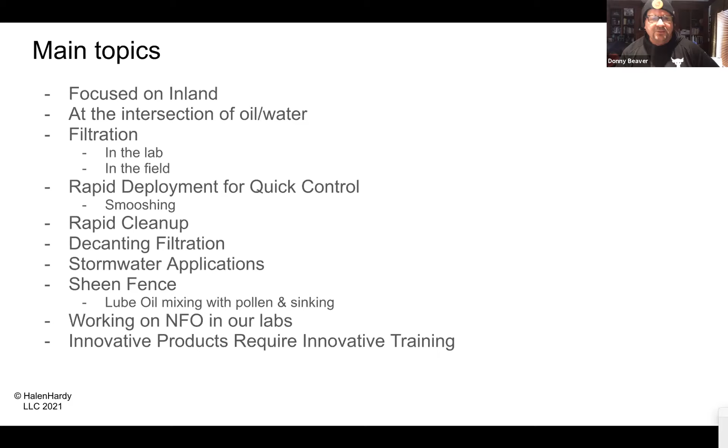So basically, I'm at the intersection of inland, where water meets oil, and a lot of times it's where stormwater meets oil before it gets to an inland body of water. To Vince's point earlier, it's better to head it off at the pass if we possibly can. So a lot of our efforts are focused on preventing it from getting into waterways, and then helping once it does.

The first video is talking about this intersection, and I just about flunked out of high school physics. Really didn't see any use for it until I got into the world of cleaning stuff up. And so we decided when we started HalenHardy to create our own little torture trough as a way to test the popular spill control materials that are used on land or inland.

Clay is first. Our torture trough is 16 inches wide. It's about a gallon of water a minute at a 5-degree slope. And you can see the stuff fails right away. It's no surprise. What was a surprise to me is that over 70% of all spills seem to happen in wet weather on the inland side of things.

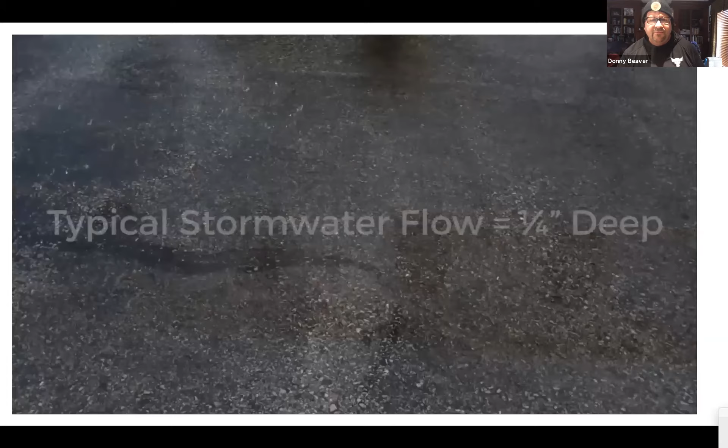And the same thing is true with white spill materials. They hate water, so the oil floats up and over or around or moves the product out of the way. So we decided to go back to the drawing board, and instead of trying to fight Mother Nature, we'd work with her. And we noticed that sheet flow is normally about 1/4 inch deep in an average Pennsylvania rain event.

And so when we started to do the physics of why this stuff is not working, we realized pretty quickly that a 3-inch sock only has a 1-inch bottom that's in contact with the surface area of where the spill is happening on land. Now in the water, it would be the facing side of it. But because most of these materials are made to float, which is really good if you're in a body of water, on land it's not good. No matter how you try to position it, they just want to float out of the way.

And even once positioned, there's always nooks and crannies where the oil can sneak around, since the oil floats on the water, and it just finds the path of least resistance and down the drain. And so we came up with the term flat's where it's at. We needed more surface area. We needed a material that would allow water to filter through.

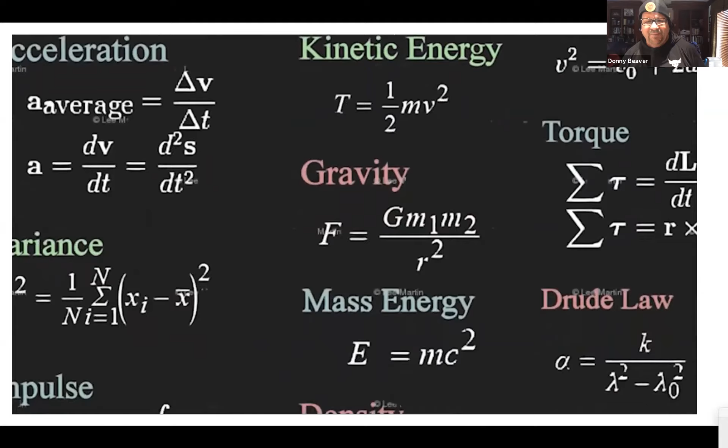And so we found some fibers. Actually, we found recycled 100% post-consumer waste that would hold back the oil, keep the oil on the upstream side, and let the clean water filter through. And so my friend Albert Einstein comes into the equation again, and we said, all right, just how thick should it be? And we came up with 1/2 inch, sort of arbitrarily at first, because if you notice, the line there represents 1/4 inch of rainfall.

And so we thought if we doubled that, that might be a good place to start. And as it turns out, we sort of lucked out after 3,000 or 4,000 hours of coming up with an 8-inch wide, 1/2 inch thick strip that would handle most normal rain events for an inland oil spill.

And as we were talking, the more surface area you have, so these particular strips were designed to be 8 inches wide versus the 1 inch surface area of a sock. So you have 800% more surface area, plus our stuff doesn't float, which runs sort of counterintuitive to what most people think about oil spill products, but on land, it's real helpful. And there's an overhead shot of how it works.

So I went to work where a lot of our other products were cooked, in my garage at home. That storm drain goes into the municipal stormwater system, so I have to be a little careful because everybody knows what I do.

So then we started to ask the question, what happens if you have more than 1/4 inch of water? And we realized that we could stack our strips on top of one another and then create what we call a filter ramp or the shingling effect on the upstream side. And so you can see the dry part, the water isn't breaching the dry part, and the oil is held back and the clean water filters out the other side.

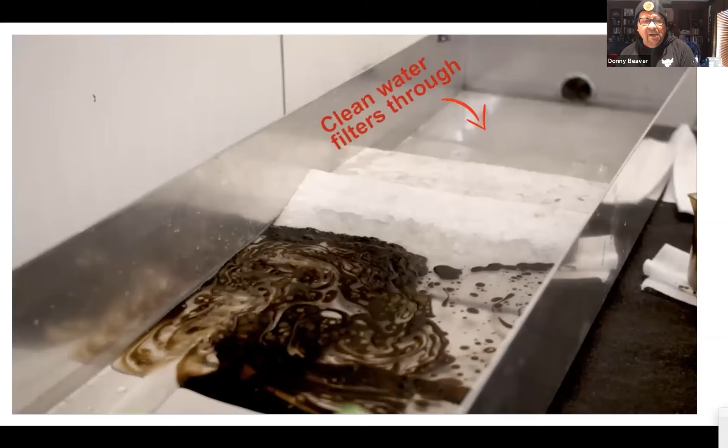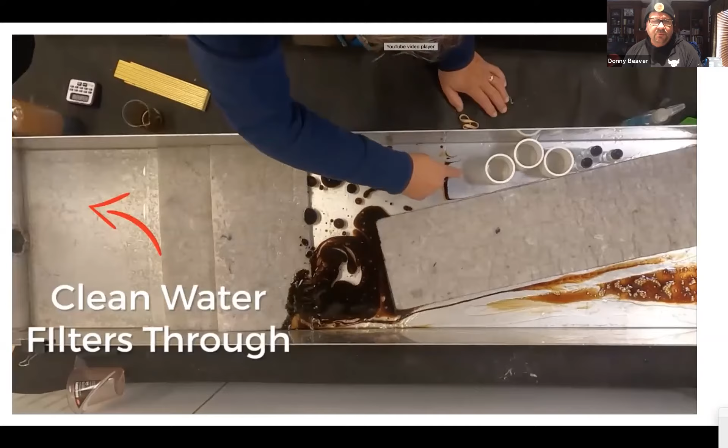And so with that in mind, we started to say, what else can we do with this, or what ways can we utilize this? I dare not call it a technology because compared to everybody else's, it's pretty simple stuff. But we thought, well, could we steer a spill with this? And we found out, yes, indeed, we could steer a spill underneath my elbow or the assets that we were trying to protect. And we steer the spill to the ramp where we want to stop it, and we prevent it from going toward the assets. So it's real helpful to keep the oil from going where you don't want it.

So we sort of had what we call the trifecta: steering, stacking, and shingling, so that we can shield the drain downstream there from the oil getting to the drain.

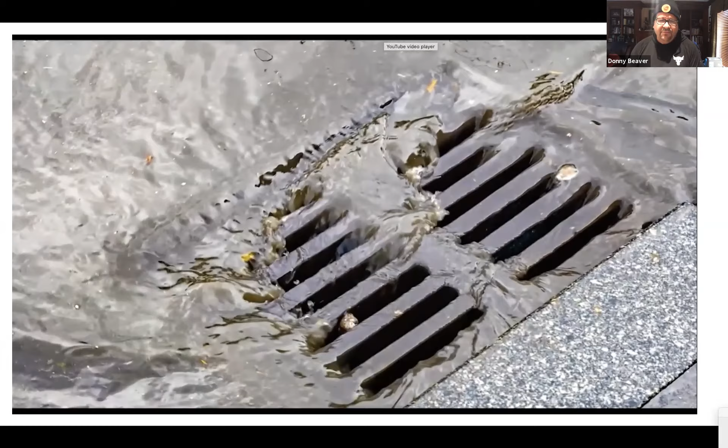And then, of course, form follows function. And so we said, what would be the best form to start with? And so we started with a trout stream. I've been protecting trout streams for 40 years. And we said, let's work backwards from the trout stream. Let's go up the ditches and the gullies and through the wetlands. And where does this stuff come from? And most of us know it comes not necessarily from a cul-de-sac, but from a storm drain. And we said, well, let's make our stuff the right size to cover a storm drain so that we could shield it and act as that first line of defense so it doesn't get into waterways.

So this is a standard size 32 by 48 inch. We call the material Husky. This is a live in the field situation where you can see the outline of the storm drain is sort of lighter colored and the oil is collecting on the edges. And it's usually 45 minutes to an hour till a spill response team shows up, but the frontline worker can put this down and sort of at least have his first line of defense in place while he's waiting.

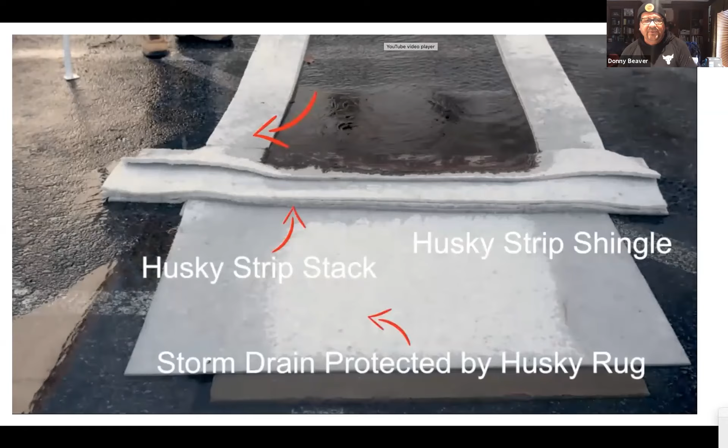And then we took this steer, stack, and shingle idea, and this is a controlled spill, but we have about 5 gallons a minute of water coming down. We put the strips on either side to act as a steering device. We stacked and shingled at the bottom part, and the oil never breaches. And below it, you can see the outline of the storm drain. So we borrowed Ron Popeil's pocket fisherman, or no, I guess it was the toaster oven or whatever, set it and forget it.

Then we discovered something else. Our materials were highly compressible. And so we thought for frontline workers, it would be pretty cool if we, we call it smooshing, smoosh them down. So these are 5-gallon spill kits, side by side, typical bucket, typical spill duffel, and then our filtration materials.

And we just give you a little unzip tool. That 32 by 48 inch pack is inside. And essentially, it helps frontline workers: seat pockets, underneath the seat, in a toolbox, any little nook and cranny you have on your vehicle, behind the seat of a backhoe, are all good opportunities. And so that was our first line of discovery that we did as we were starting HalenHardy.

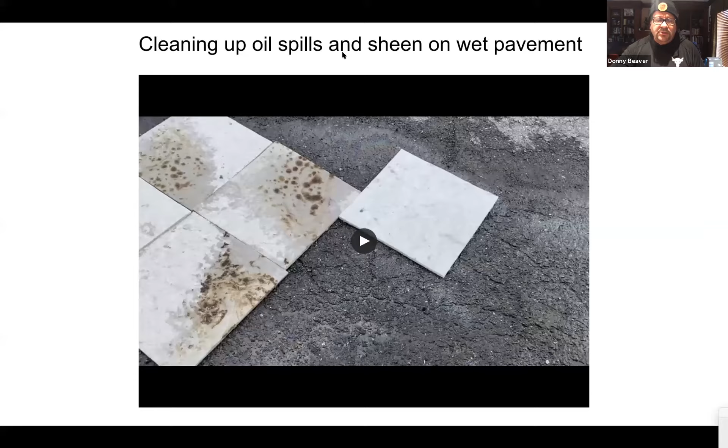And then the next was, okay, that's doing a good job of steering it and preventing it, but what about cleaning up? And here is a little pothole in our parking lot. We created a sheen at first. This is used motor oil. We like to use that just to be visual. And then we created also that extra little plops on top.

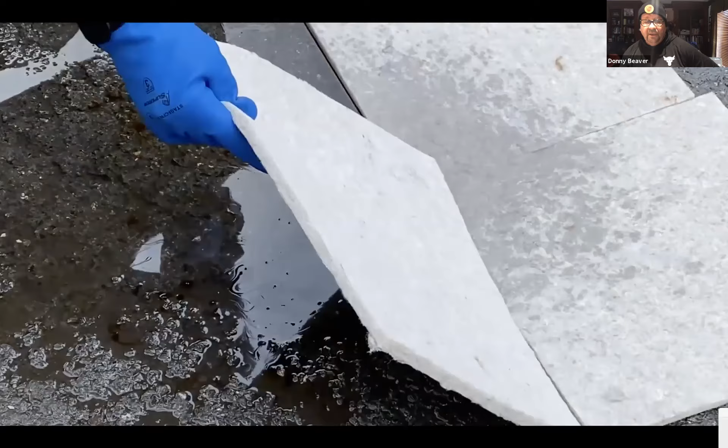And we take the same material, and because it doesn't float, you don't want to throw this out on a body of water, but on land you can lay it down. And essentially what it's doing is it's allowing the oily water to filter up into the fibers, and the oil is sticking to the fibers while the water wicks through. So you'll be able to see as we flip it over here in a second that even the fine swirly oil as well as the blobby stuff is showing up nicely.

And you can see behind when we lift them up, there's no real visible sheen underneath to speak of. And this is a very small spill. Obviously, all these things have their own capacity. Each one of these, it's about a half gallon. But there was a sheen remaining around the pothole after we got rid of all the water. So this is just demonstrating how the same materials can be used.

They're thick and spongy. And so you can basically, without a lot of labor, we call it a few love taps here, just pluck the sheen off the ground down into the nooks and crannies of the pretty badly cracked blacktop.

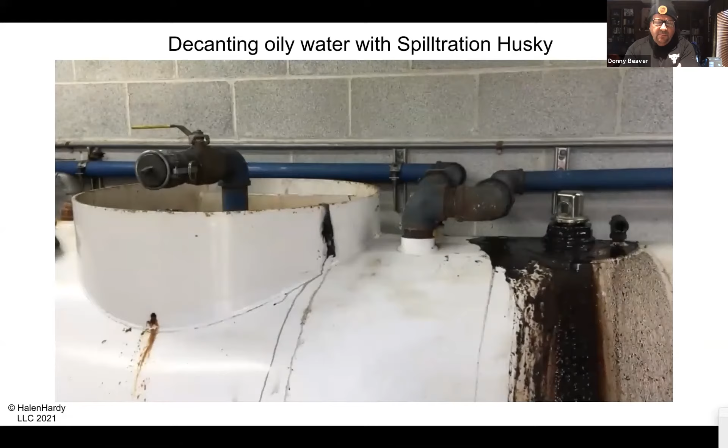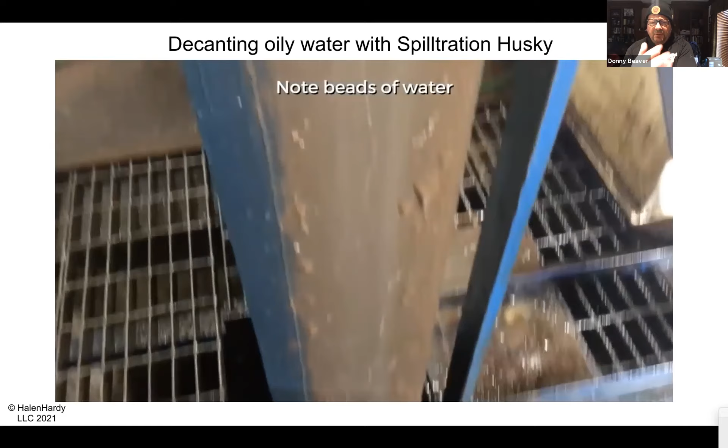One of our customers came to us and said, well, gee, this stuff works pretty well. We have a real problem with our oil water separator. I'll just let the video speak. So they had a 300-gallon overflow tank for a belt skimmer, and you can see the black oil that was oozing out the top. They had to have a vac truck come in about every 7 to 10 days at $1,200. And when we took a look at it, we saw that the overflow stuff looked more emulsified, and there was lots of little water beads on the belt skimmer.

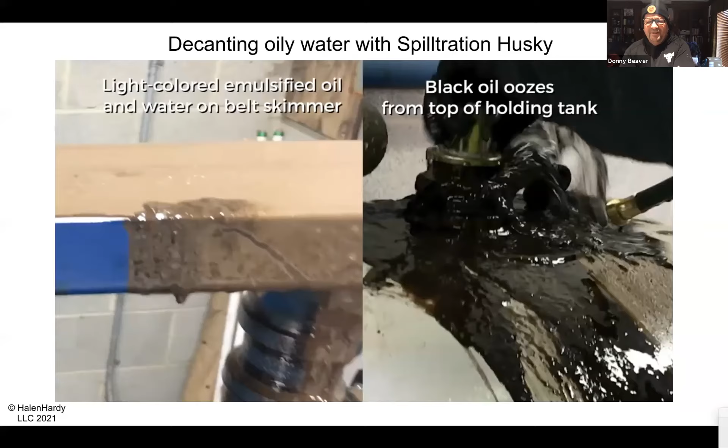And we just sort of had a hunch that the 300-gallon overflow tank wasn't full of 300 gallons of oil. We thought there's probably a lot of water based on the color differential between what was coming out the top and what was in the trough. And so, we decided to just put a little sump pump down inside, and you can see it's clean water coming almost immediately. Most of the stuff discharged, and we took our Spilltration materials and we just created a little filter sock here, and we used a sump pump to pump it out.

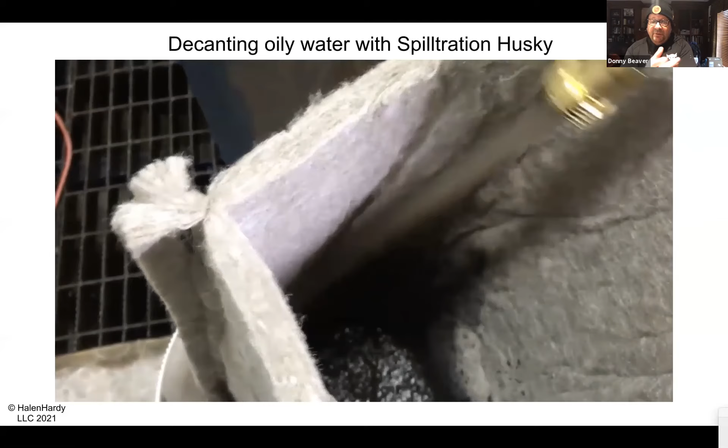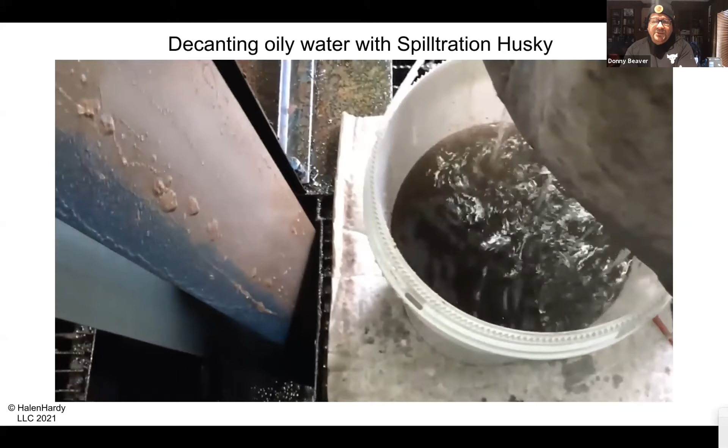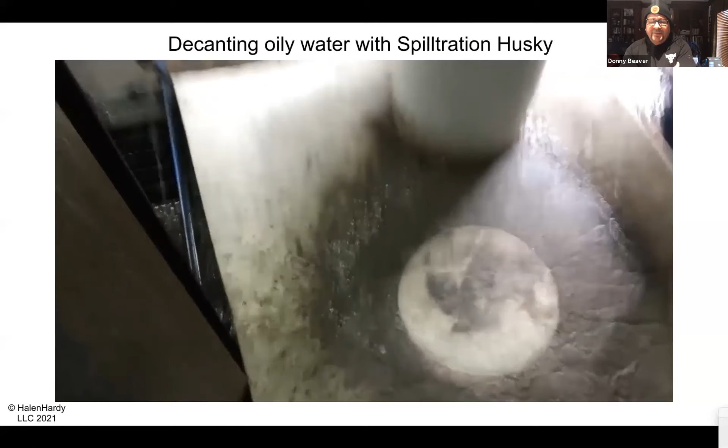And it took a little over a couple hours, the whole process the first time as we were learning. But you can see the bucket still has some degree of discoloration, but we pumped out all 300 gallons, and you can see the water's gotten clearer and clearer as we're going. And there's a little oil ring. Altogether, we collected about a half gallon of oil out of 300 gallons in the tank. But you can see that none of the real dirty stuff got through the filter.

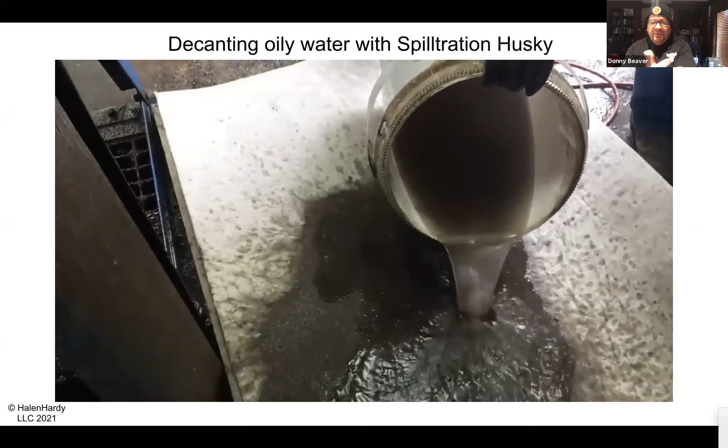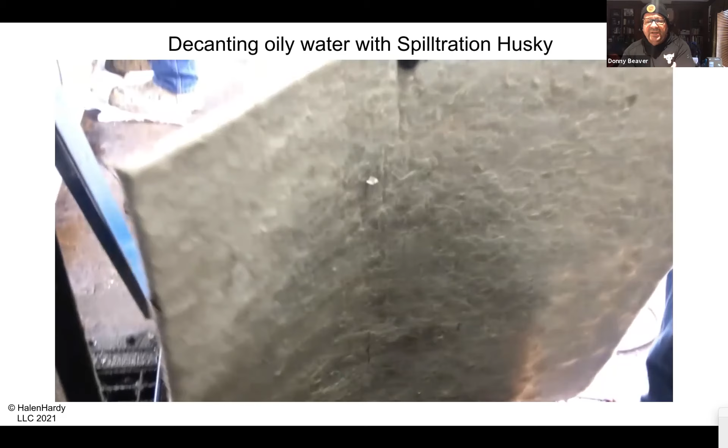And then we put a clean filter pad down, and we decanted the rest of the water. It flows through at about 40 gallons a square foot a minute, so it filters through quickly. And when we lifted that up, you'll see it's dirty on the top and clean on the bottom, and there's the old sheet below it. So this was basically a $200 job replacing a $1,200 job, and everything was staying on site in a closed loop system, with the exception of the soiled pads. And then we said, well, let's make it a little easier.

Why don't we build a decanter bucket using the same materials inside of a 20-gallon overpack? It's gotten a little more sophisticated looking in the last 2 years, but when we first invented this, it just got the right number of holes poked in the bottom to allow the flow to keep up with the materials on top. We've discovered that we do this about twice a month, and so far we've only had to change the filter fabric twice in 2 years. So it's a pretty effective way.

It's saving them about $1,000 every week to 10 days, and they don't have to worry about any permitting stuff or the vac truck going through a safety briefing or anything. It's a pretty simple process.

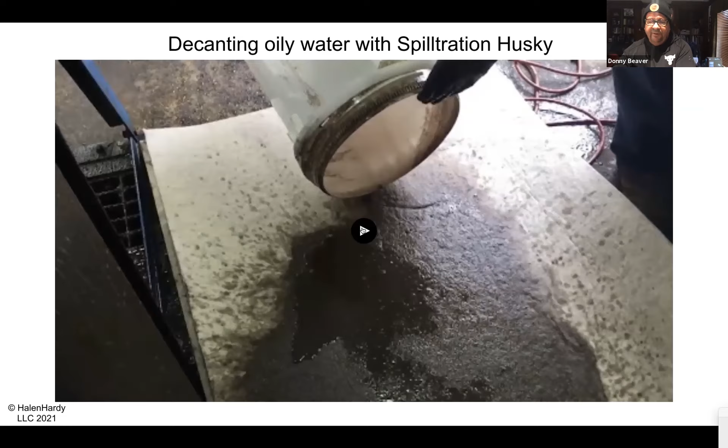And then the same customer saw how well the fibers worked, and he said, can they filter oily suspended solids? And we said, I don't know, let's give it a try. So here is an outfall that goes into a top 100 trout stream 6 miles from my front door. And this is years of oily sediment built up in a rail yard, cinders from my great grandfather's era, mixed in with lube oil, diesel, and Lord only knows what else.

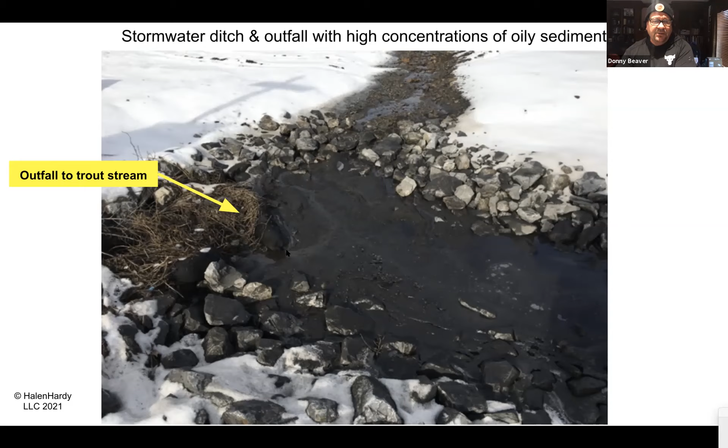And the outfall, they had a white boom. You can barely see it there. It's black now. And they said, that's your challenge. So we said, well, let's clean it out. Let's line the ditch with the material. Let's make a few little check dikes out of our filter material. And just the first day we had it down, we noticed we were starting to collect the oily sediment.

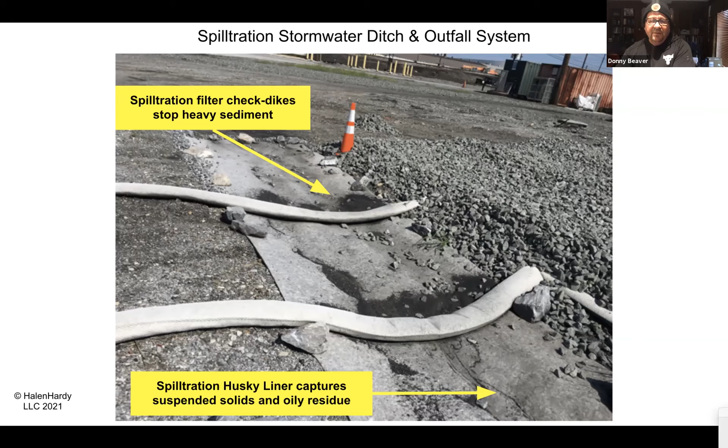A few weeks later, you can see a little bit of sheen on top in a couple places there. We built a filter cover over the inlet to the outfall out of the same material. Good news is their fats, oil, and grease measurements fell back in compliance for the first time in years, and their suspended solids went from 323 milligrams per liter down to 9.

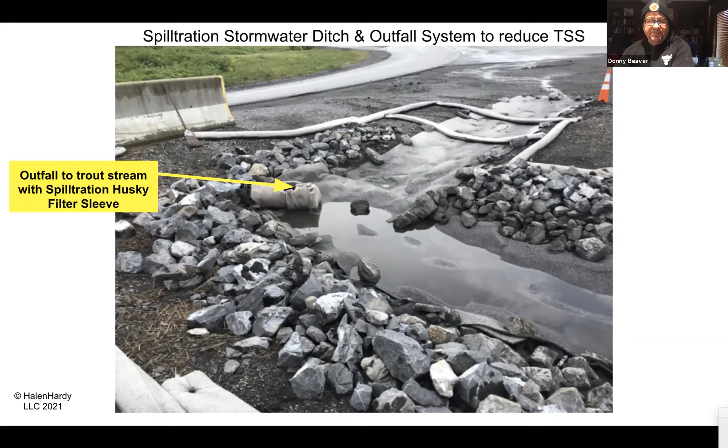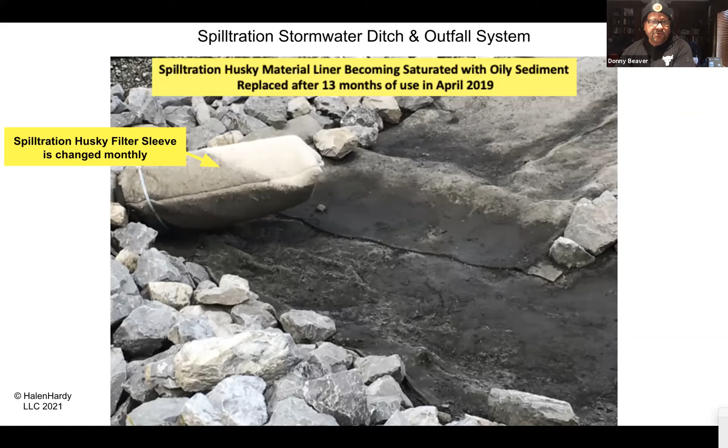So the material does a really good job of capturing the suspended solids, and if it has oil attached to them, all the better. The filter sleeve, you can see the line around it. It gets changed monthly. The material in the ditch itself is on an annual schedule now. It was changed after 13 months the first year. Now it's on an annual schedule.

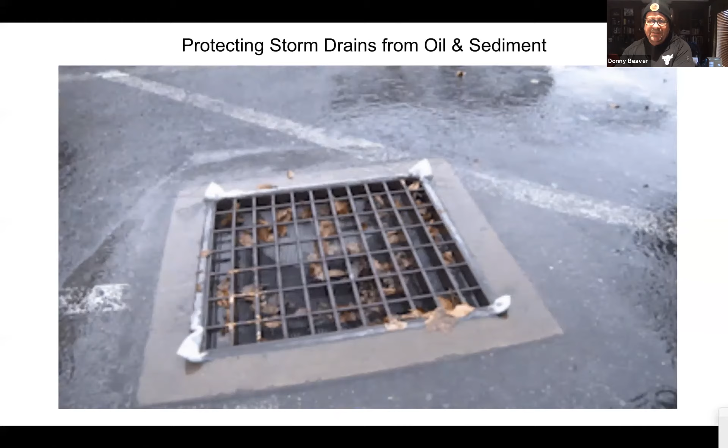And then the same guy said, hey, I've got some other storm drain issues where we have NOVs over on the other side of the yard in what we call the traction motor storage area. And it's real greasy. Do you want to come over and take a look? And so we did. And essentially what we discovered was the same materials configured a little differently could protect storm drains.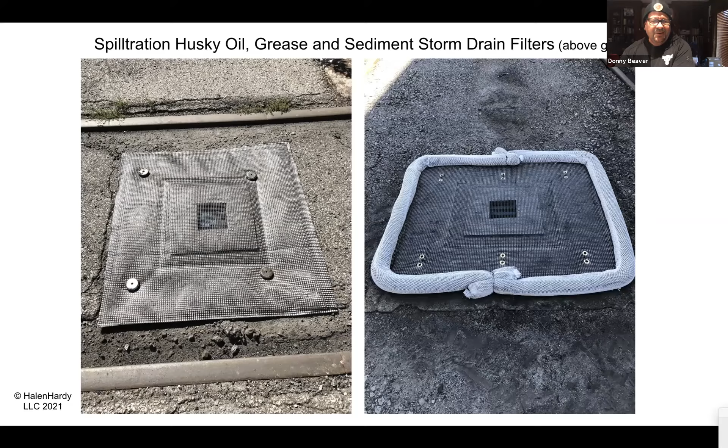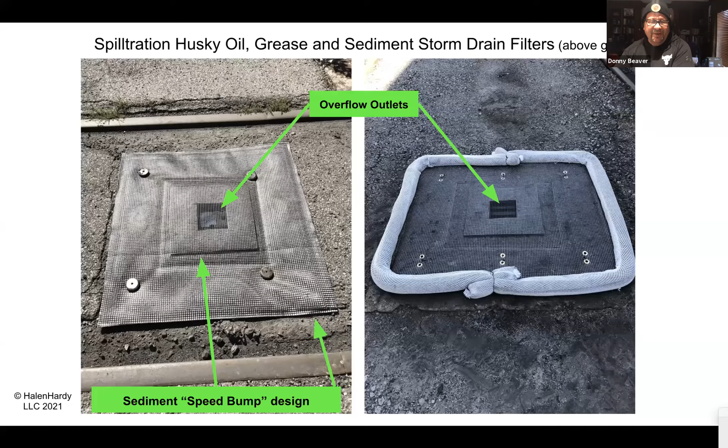So these are above grate storm drain covers that have a durable netting sewn on top, and then they have what we call speed bumps. There's an overflow outlet in case we get a heavy storm so that they won't flood the yard. And then there's what we call little speed bumps that we've accidentally engineered into the process. We discovered that the sediment and the oil slow down better if you give them a place to slow down. And so we built in these little places to stop it. The other one had a filter sock around it.

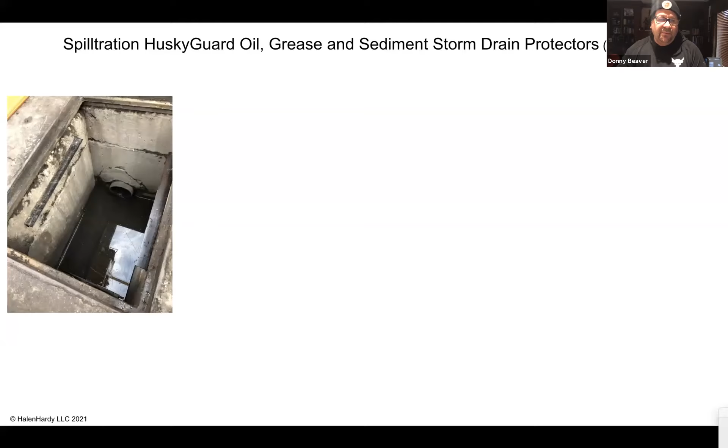And then in high traffic areas, they said we can't be running across them with tow motors. So what we did was we removed the grates and we put L channels, subgrate, put some fiberglass grating in, and then put our materials on top of the fiberglass grating. And because it was a 100-year-old storm drain, we had to put some chinking around the edges to keep everything within the confines of the drain.

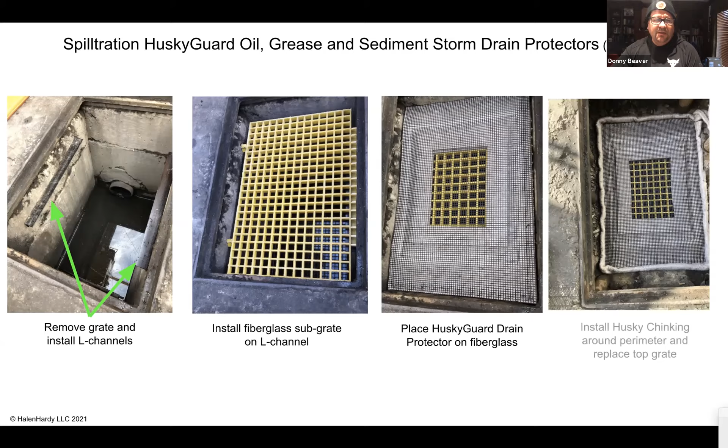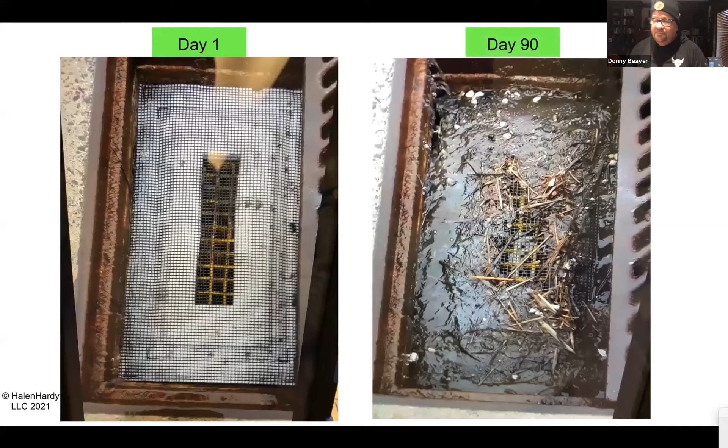And here's what it looked like on day one. And we basically said, well, let's put it on a quarterly maintenance schedule and see what it looks like at day 90. And there's what it looks like at day 90. It's basically mostly grease, some lube oil, a little bit of sediment, and some yard residue. But again, they fell back into compliance and have been doing that now for, I guess it'll be 2 years in March. So now we're working on my two personal holy grails for an inland guy. Holy grail number one is oily sheen.

And so we partnered with another manufacturer to use their technology to build what we call a sheen fence. And essentially, again, for inland waterways, small bodies of water, ponds, small lakes, streams, not too useful in many other applications, but essentially what happens, same deal. The water passes through and the oil sticks to it. And so you can see in this one case, you can't really see the sheen there.

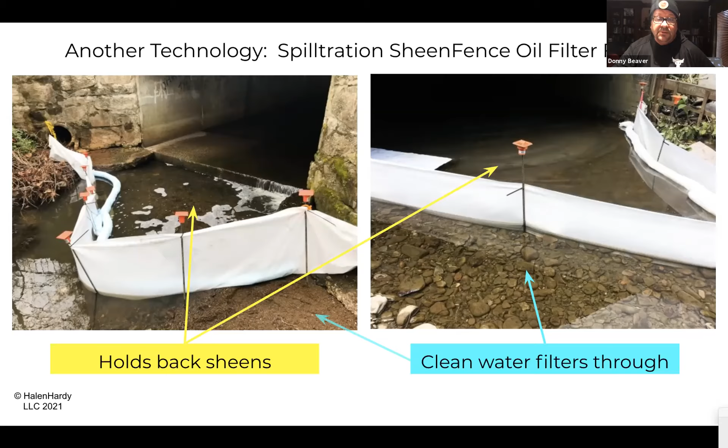Here, this is lube oil on the right-hand side. The other one was diesel. And in both cases, you look at the downstream side and you see nice clean water. The one on the right is a trout stream. And so it goes from sheeny, soiled on the upper side to nice and clean underneath. We can create an underflow dam if we need to out of this material also. And then finally, I'm not going to show that one. That's just how we did it in our torture trough.

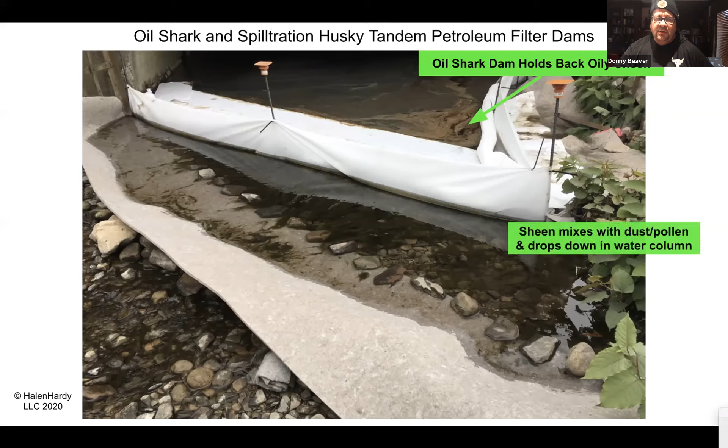And then we sort of married the two technologies. So the sheen fence is upstream, and you can see the oily residue there. But because of the time of year, you can see the flora on the sideline, lots of pollen in the air, lots of dust. So it's mixing with the lube oil sheen and dropping out. So we then put our husky material downstream and built a little filter ramp where it's catching the non-floating oil. And there's some stringy algae-like material in there too, but it's also the contaminant-laden non-floating oil doing that.